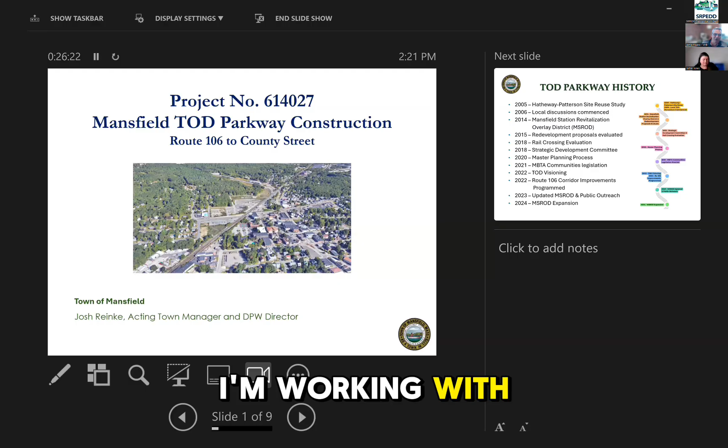I'm here on behalf of the town of Mansfield, and we're here to discuss the Mansfield TOD Parkway construction project. I'm working with Josh Reinke. He's the acting town manager and DPW director.

So I threw this slide in, something that we use at a public informational meeting. Just shows you the history of how we're working in this TOD area. This area is north of Route 106, but west of the northeast corridor. I'll have some graphics in a few minutes, but just showing you that the town's been working on this for the last 20 plus years. But there's a lot of momentum going since 2018.

So with this, just to give everybody an orientation, Chauncy Street at the bottom of the screen is Route 106, northeast corridor running from the bottom middle up to the upper right. We also have what I call the spur that heads off to Foxborough and Gillette Stadium, running through the middle of the screen.

The area that we're talking about, again, is north of Chauncy Street, in this area. If you can see my pointer moving around, it's basically open parking space. And then we'll continue up, do a rail crossing and get up to County Street, which is in the upper right area of the screen.

There are a lot of stakeholders involved. As you can see through the years, the town's been working on it. There are the neighborhoods that are adjacent to the train station. They provided a lot of feedback at our public informational meetings and have guided us to the project that you'll see in a few minutes.

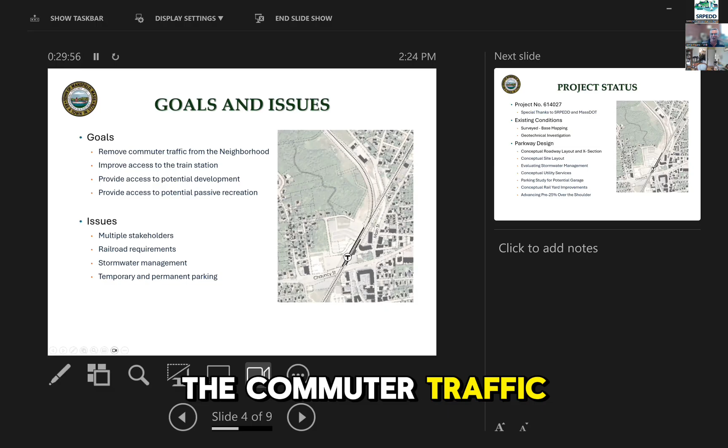It's also very difficult to pull out of Highland, especially if you want to go east on Chauncy Street. So our goal again is to remove the commuter traffic from the neighborhood. We want to improve access to the train station and provide access to potential developments, again working with the property owners that own this land here, just to the west of the northeast corridor.

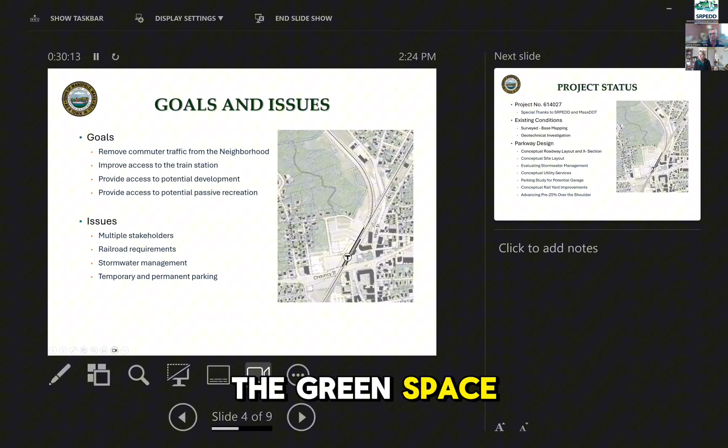And then the town also owns the green space in the upper left area. Their intent there is to potentially build some passive recreation in the future, and again provide that access off of the roadway that we're going to create as part of this TOD Parkway.

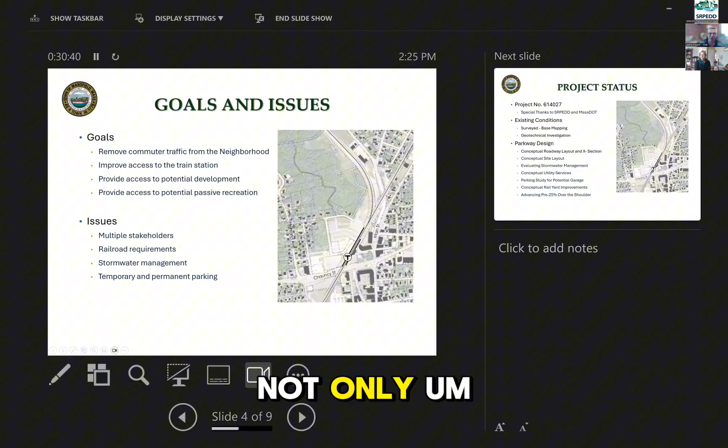Issues that we're up against: as I mentioned, the multiple stakeholders, just trying to get everybody's input to make sure that we're doing this correctly, and we've made good strides on that piece. The railroad requirements, not only how we're going to handle this through there, but making sure that CSX still operates. Dealing with the stormwater management and addressing the site as we develop the roadway. And then during construction, how are we going to temporarily and permanently park cars so that everyone can access the train station.

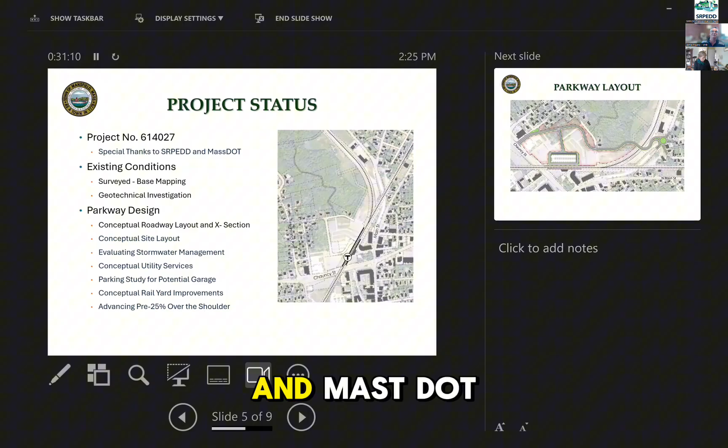In terms of a project status, where we're headed, first, just want to thank SRPEDD and MassDOT. As we presented this project before, just the coordination that had happened, we were able to get this project number of 614027. So again, from everybody that was involved, thank you very much.

The existing conditions, we've surveyed the piece and we have base mapping. We've done some geotech investigation throughout the project area. You'll see the conceptual roadway layout and cross sections in a minute. We've also done some conceptual site layout. Again, that's not part of this roadway project, but it's just sort of feeding in, providing information to some of our stakeholders. We're evaluating the stormwater management, and we will ultimately be adding in new utility services for not only the roadway, but the private development.

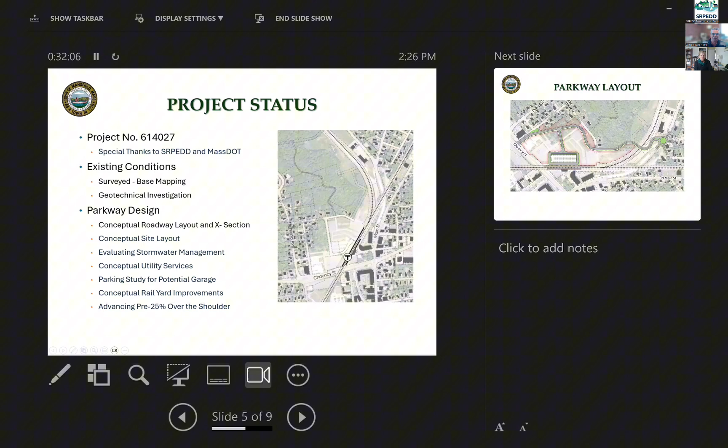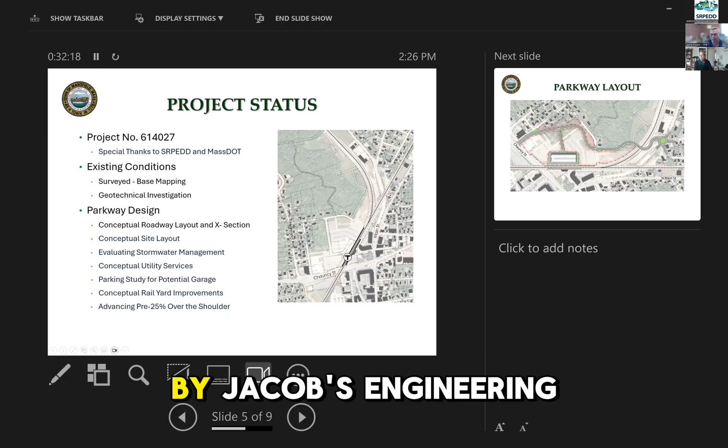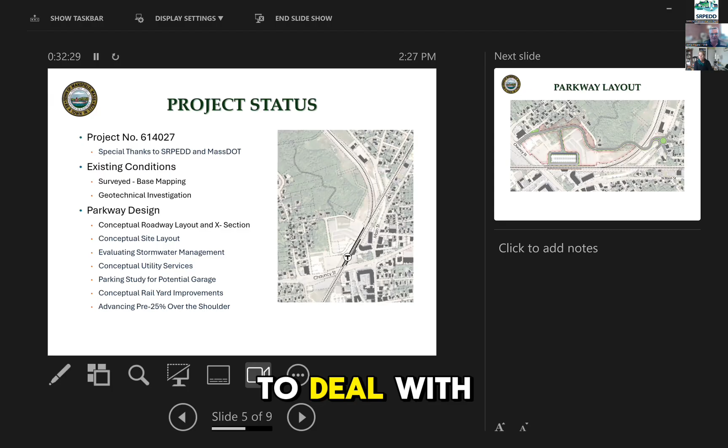As a part of this, you'll see that there's a potential parking garage. We've done a parking study to provide some more information for the town to see if that's a reasonable approach. There's also been some conceptual rail improvements that was done by Jacobs Engineering for MassDOT. Again, as a crossing and all the requirements, it's another factor that we have to deal with. And right now we're advancing the pre-25% over the shoulder submission. That'll be going in the next month or so to MassDOT for review.

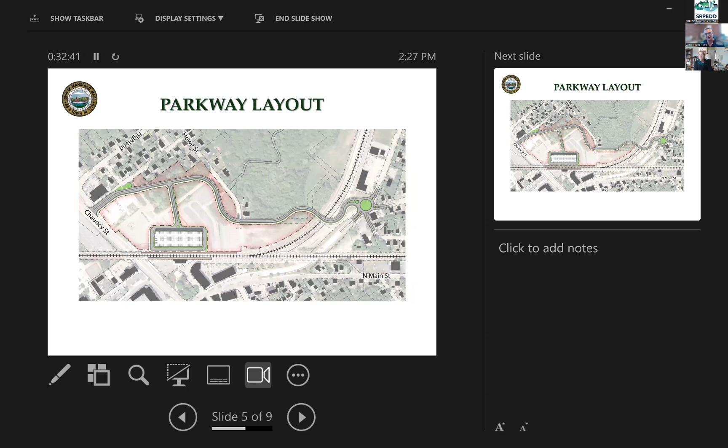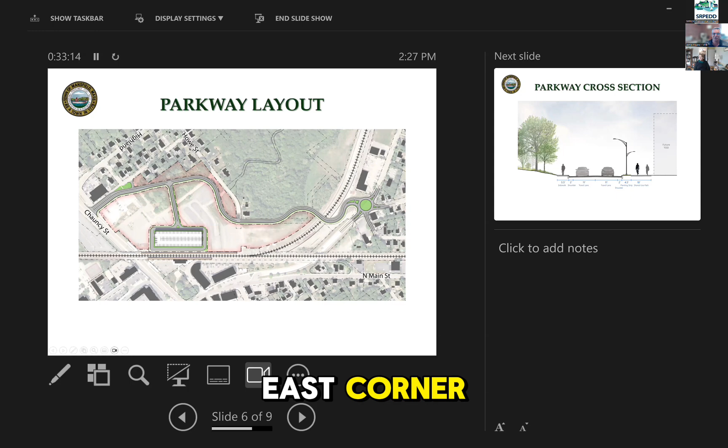So in terms of the layout, I've now turned the picture sideways for you. Chauncy Street, Route 106 is on the far left. The Northeast Corridor is running from left to right in the bottom part of the screen. And again, the spur that goes off to Foxborough and Gillette Stadium comes from the middle of the screen, goes to the upper right. Our new roadway would hug sort of the western side of all of these properties, come through the rail crossing, again, which makes the rail yard operational, and also we have the distance between the Northeast Corridor and the rail crossing. All that's been worked through with MassDOT. So again, conceptual wise, we have that.

Our intent is to install a roundabout up here on County and North Main Street. We've met with individuals up in this area as well, just to get their feedback and understanding to make sure, again, we're accommodating as many as possible. So I know this picture shows a parking garage. And again, just imagine that that part is not part of the project that we're talking about at this point. It is just the roadway. If you just follow my arrow, just coming through. Again, the intent here is just a 25-mile-per-hour design speed. So we move through this area. Again, it opens up development.

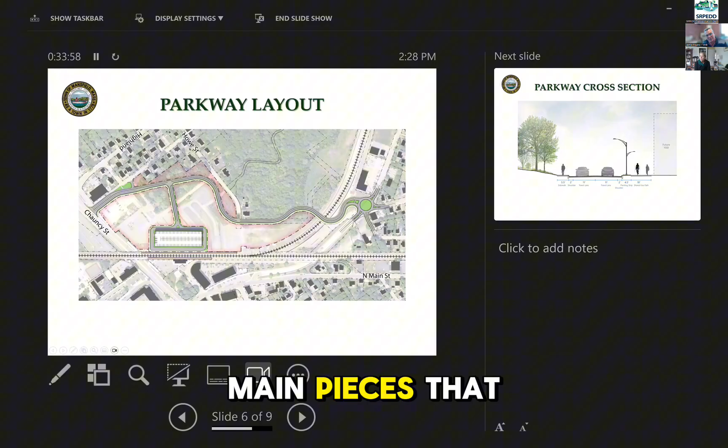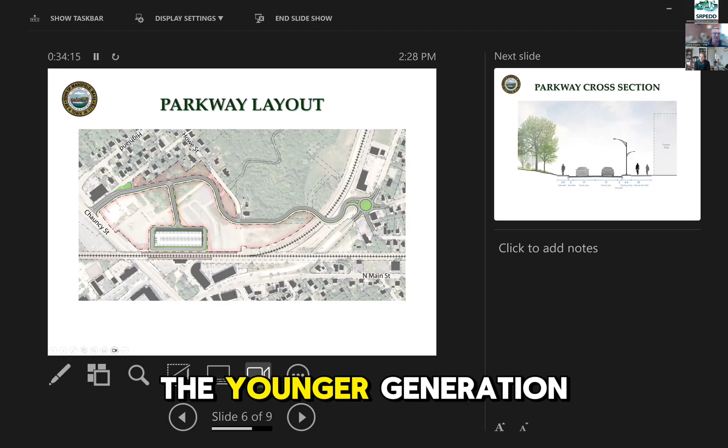One of the main pieces that we heard in the public informational piece is sort of the younger generation that grew up in Mansfield was saying we need affordable housing. And they feel that this is an opportunity for some housing that could go in and that the younger generation could buy and then ultimately stay in Mansfield.

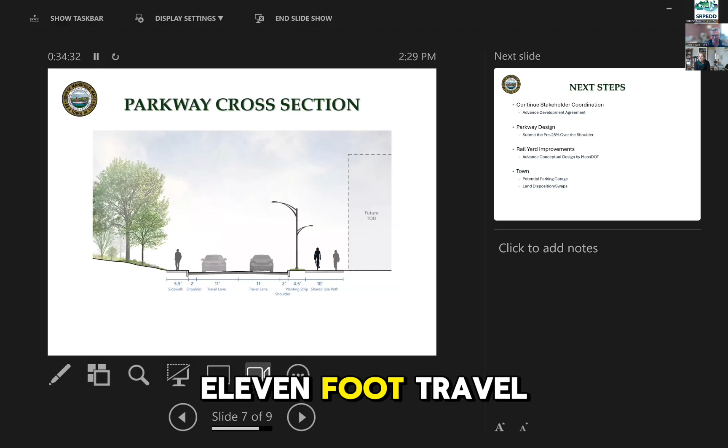From a cross section of our parkway, on the west side, our intent is to have that 5.5-foot sidewalk that includes the curb, 2-foot shoulders, 11-foot travel lanes. Then you'd have a slight buffer and a shared use path on the TOD side or train station side. That would carry all the way through from Route 106 up to County Street.

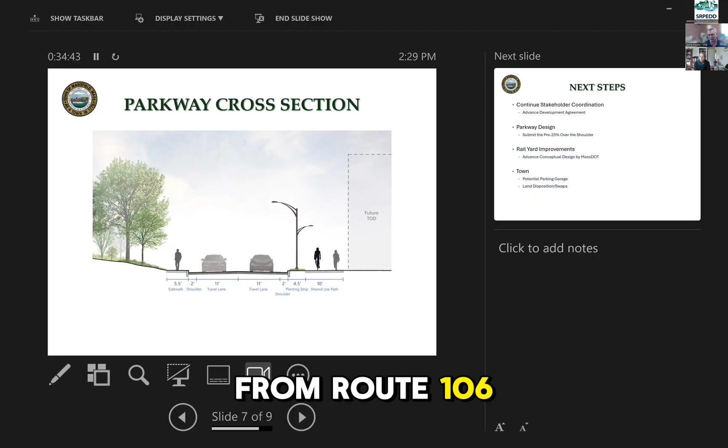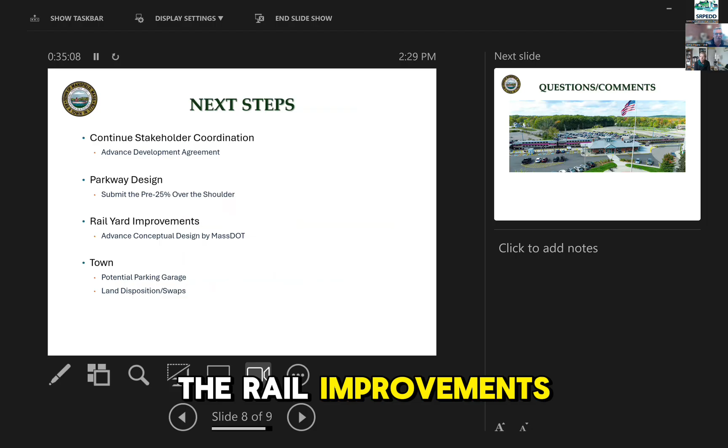Next steps, again, we're continuing all our stakeholder coordination. We've also begun advancing a development agreement to keep everybody on board. Again, there's land swaps that are going to happen. There's a lot of moving parts here. We'll be submitting our 25% over the shoulder. And again, from the rail improvements, we'll continue to work with MassDOT, CSX to make sure that that can be advanced at this point as well. I went fast, but just wanted to open it up to questions, comments.